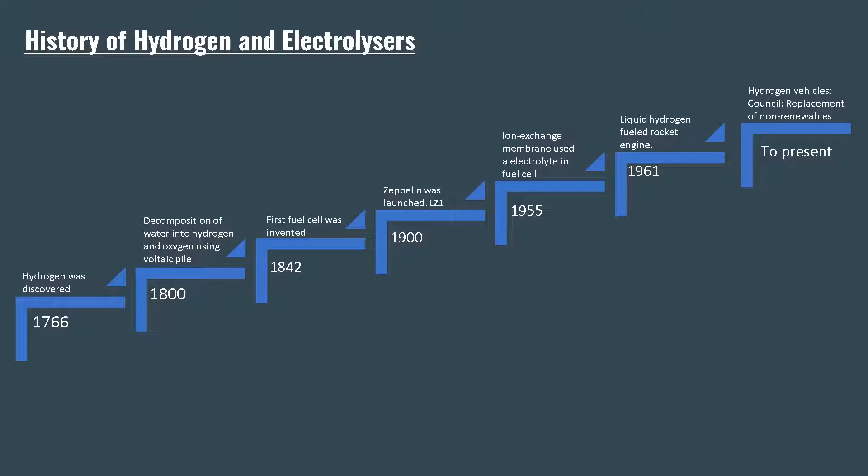Now talking about the types of electrolyzers, there are basically three types: the alkaline, the proton exchange membrane, and the solid oxide. The alkaline electrolyzers are the most primitive type of electrolyzers, and they use a potassium hydroxide solution of about 30% to decompose water into hydrogen and oxygen. Since they were the primitive, they are the most durable and most mature type of technology for electrolyzers. There have been various developments in this type of electrolyzer. Its features include less corrosion problems since the acidic medium is not included here, and also the cost effectiveness of the electrolyzer.

Now talking about the disadvantages, it has a very low current density and gas crossover, meaning the hydrogen and oxygen are mixed, and also a low partial load range. It means that when the electrolyzer is set to operate below its rated power, its efficiency is decreased. Also the operational pressure is very low, meaning the output pressure of the hydrogen from the electrolyzer is low.

Now talking about the proton exchange membrane, it uses a solid polymer for the decomposition of water, and only the hydrogen ions can pass through the solid polymer. Its features include higher current density, good partial load range, higher gas purity, faster response time, higher operational pressure, and compact design. The disadvantages include higher cost, problems of commercialization because it's very expensive, and also the corrosive acidic environment.

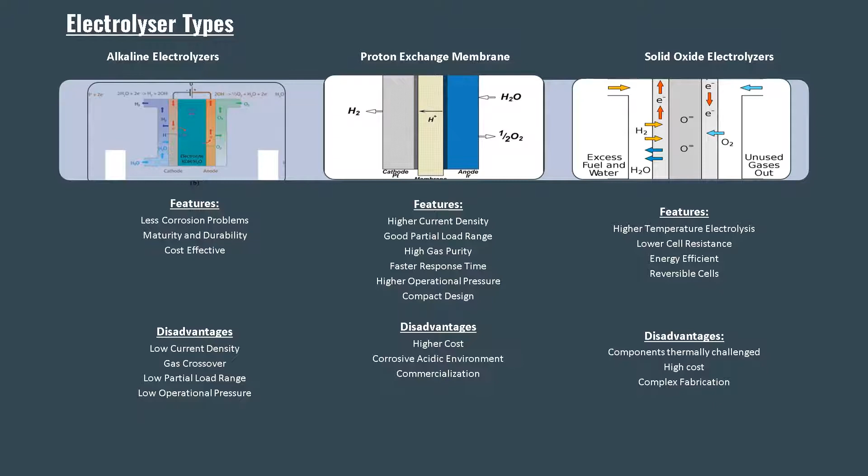Now talking about the solid oxide electrolyzers, they are the most recent and being researched on. They are very high temperature electrolyzers, and due to this there is very low cell resistance, and they are energy efficient since less energy is required to break down water as the temperature is already high. Also, they can be used as both fuel cells and electrolyzers. They use solid oxides or ceramics for the electrolysis process. Disadvantages include the components being thermally challenged because of the high temperature, very high cost, and complex fabrication of the electrolyzer.

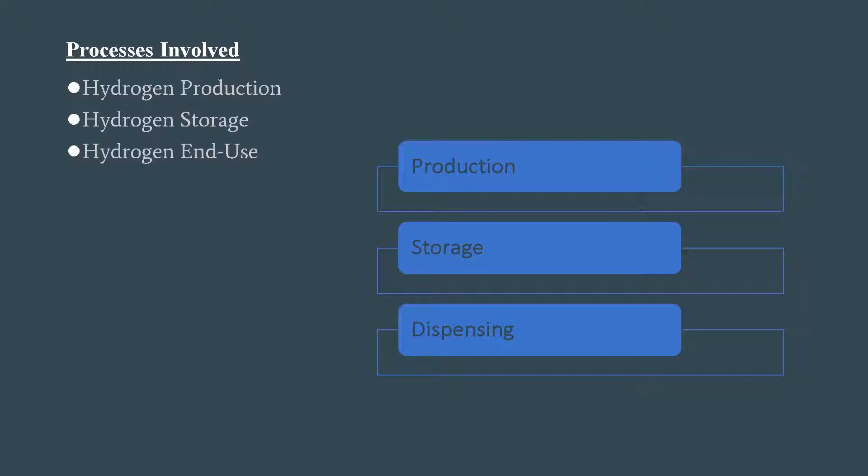Now talking about the processes involved, there are basically three stages: production, storage and end use. This is a complete process chart for hydrogen production, storage and end use. First off, we will be using electricity to start our electrolyzer. The electrolyzer operates at DC voltage, so we will need an AC to DC converter, also known as a rectifier. We will also be using a deionizer because we need to feed deionized water into the electrolyzer and remove all the ions and impurities. And we'll be using a storage tank and a water pump to pump the water from the tank to the electrolyzer.

After the water is dissociated into hydrogen and oxygen, the filtration or purification system is used, which includes a coalescer. The coalescer is filtration equipment which filters aerosols and impurities with a filter where the impurities accumulate over time and are discharged by gravity. After that, in the deoxygenation chamber, impurities such as oxygen mixed with hydrogen are removed by reacting the hydrogen and oxygen to make water and obtain pure hydrogen. After that, it is again sent to the coalescer for purification.

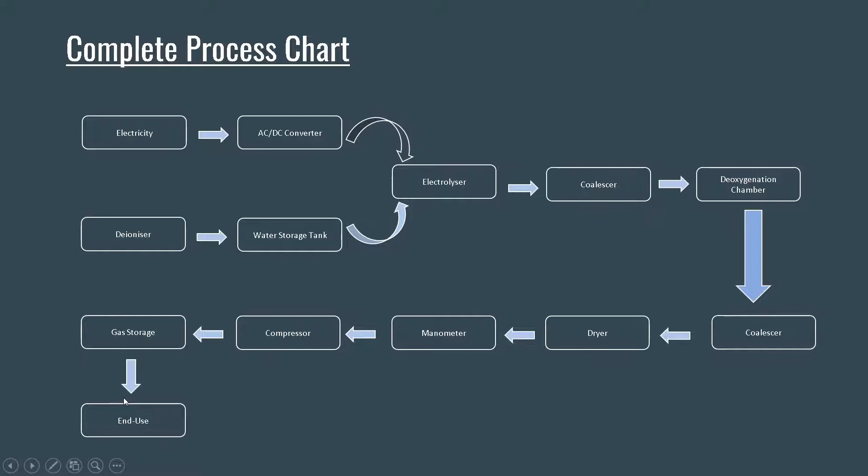After that, it is sent to the dryer before the compressor. We need to dry the hydrogen in the loop. Then we'll be using a manometer for the pressure reading of our hydrogen at the output. We will need a compressor because hydrogen has a very low density, and to increase its energy content we have to pressurize it to a very high pressure, about 300 to 500 bar. After compressing the gas, we will store it in the form of hydrides or in cylinders. After storage, we can use it in various processes, for example in fuel cells, for heating purposes, hydrogen production.

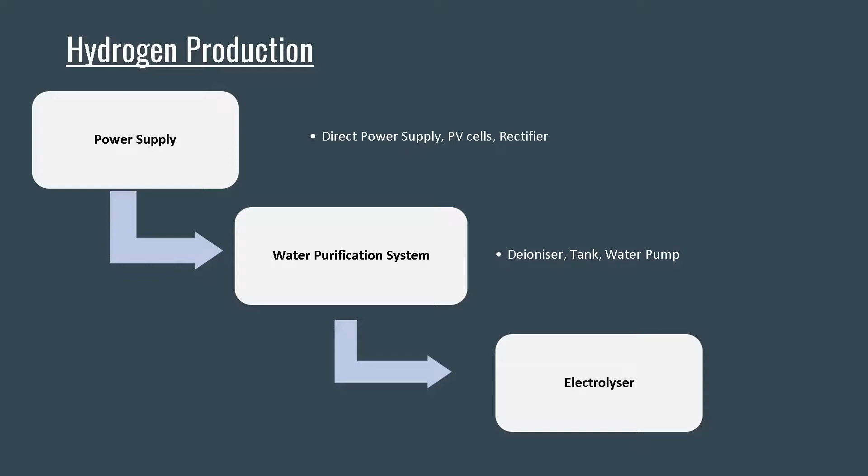So the production includes three main components: the power supply component, with the direct power supply and power coming from hydropower or other green energy sources such as PV cells, and a rectifier to convert AC into DC. Then a water purification system containing the deionizer, tank, and water pump, and our main component, the electrolyzer, to dissociate water.

So this is the specifications of the system. This system is not efficient because this was only used for the study purpose, to know which equipment works and what is the function of each equipment in the process.

So the direct supply we will be getting is 220 volt AC, and a rectifier. The rectifier is used to step down the incoming AC voltage and convert it into DC. Also, the rectifier has been chosen according to the electrolyzer size. The rectifier output voltage is 25 VDC max. The current is 15 to 75 amps, and we will need a cooling system to cool our rectifier because it gets heated over time.

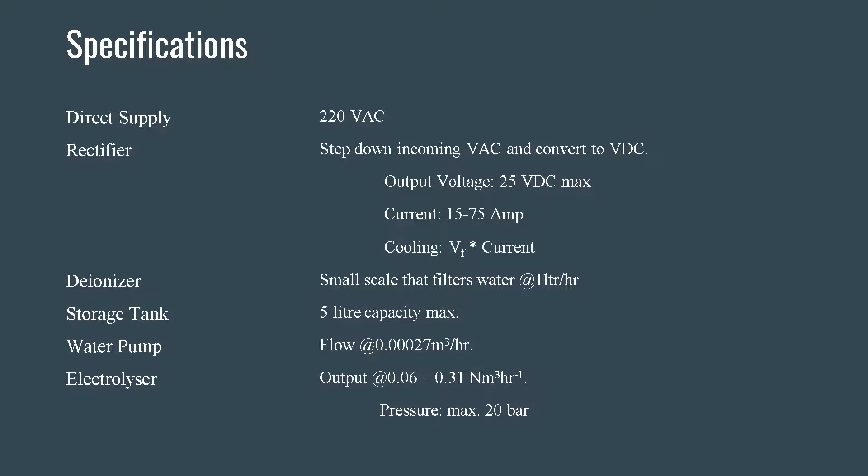We will be using a deionizer that will filter water at the rate of 1 liter per hour. After that, a storage tank to store our deionized water, then a water pump with a flow rate of 0.00027 cubic meters per hour to feed the electrolyzer, and then the electrolyzer. The electrolyzer I used was a PEM because of various advantages over the alkaline. Also, the output was 0.06 to 0.31 normal cubic meters per hour, and the pressure was 20 bar max at the output.

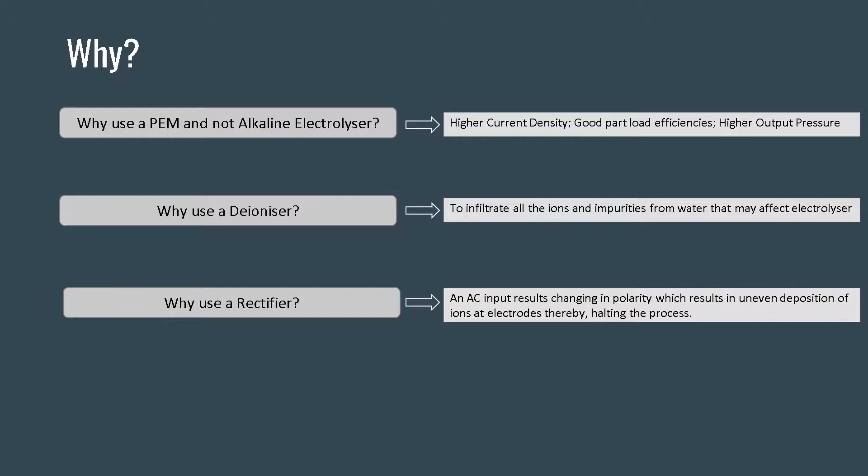So why use a PEM and not an alkaline electrolyzer? As I discussed earlier, PEM has various advantages over alkaline, such as good part load efficiencies, faster response time, and higher output pressure, but its cost is high. So looking at the overall characteristics and advantages, I selected PEM. The deionizer was used to filter all the ions and impurities from the water, and the rectifier to convert AC into DC, because we cannot run our electrolyzer on AC since the change in polarity results in uneven deposition of ions.

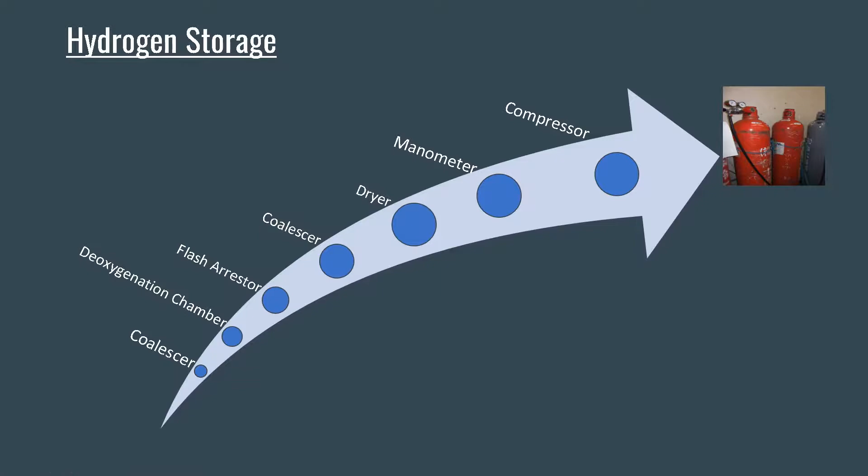Now this is the hydrogen storage. As I talked about earlier, after the hydrogen is obtained from the electrolyzer, we will need a purification system before we store the gas. So we'll be using a coalescer, the deoxygenation chamber, flash arresters, dryer, manometer, and the compressor. I hadn't talked about the flash arrestor. The flash arrestor is a device used in the loop to forbid any backflowing of gases, to prevent any accidents or fire, because we cannot let the gas backflow into the loop. This might cause fire. So the flash arrestor is needed as it restricts the gas from backflowing. So these are the instruments and devices to be used for hydrogen storage.

We will be using sensors to detect hydrogen gas leakage at the output terminal. Also a coalescer for partial drying of incoming hydrogen gas. A deoxygenation chamber to remove any oxygen impurities if present. And also we need safe storage handling for hydrogen, and it needs to be very pure. Flash arresters to prevent backflow of impurities to the hydrogen stream, using 2 of them between the coalescer and deoxidizer. Also, flash arresters that can handle pressure up to 20 bar.

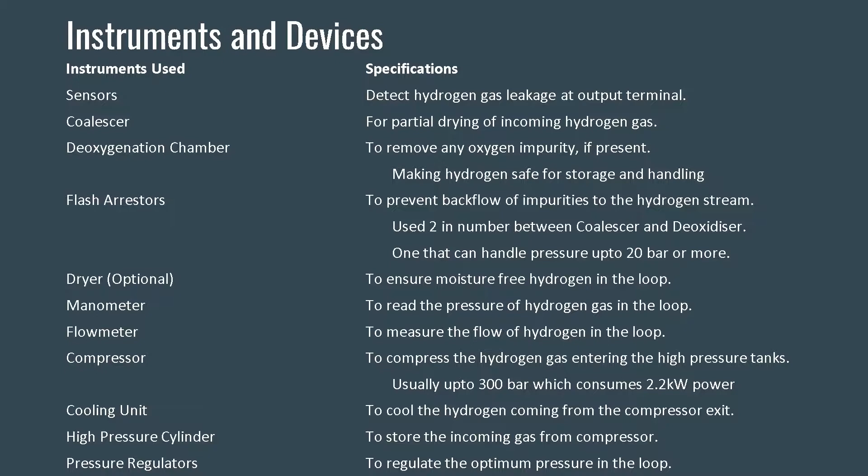Then we'll be using a dryer to ensure moisture-free hydrogen in the loop, a manometer to read the pressure of hydrogen gas in the loop, and the flow meter to measure the flow of hydrogen in the loop. A compressor is used to compress the gas at a very high pressure, up to 300 bar, and consumes 2.2 kilowatts of power. A cooling system for the gas which comes out of the compressor, and also a cooling system for the compressor itself. High pressure cylinders to store the incoming gas, and pressure regulators to regulate the optimum pressure in the loop and in the cylinder.

So this is the hydrogen dispensing system. After storage, we will be dispensing the energy with the help of a fuel cell to convert the hydrogen and oxygen into electricity. After we have obtained hydrogen and oxygen gas, we will use pressure regulators to regulate the pressure required to feed the gas to the fuel cell. And then we'll be using a humidifier. A humidifier is very much needed in the case of a fuel cell because if we send dry gas to the fuel cell, the membrane lifespan is considerably decreased, so we need to moisturize our gas before sending it to the fuel cell.

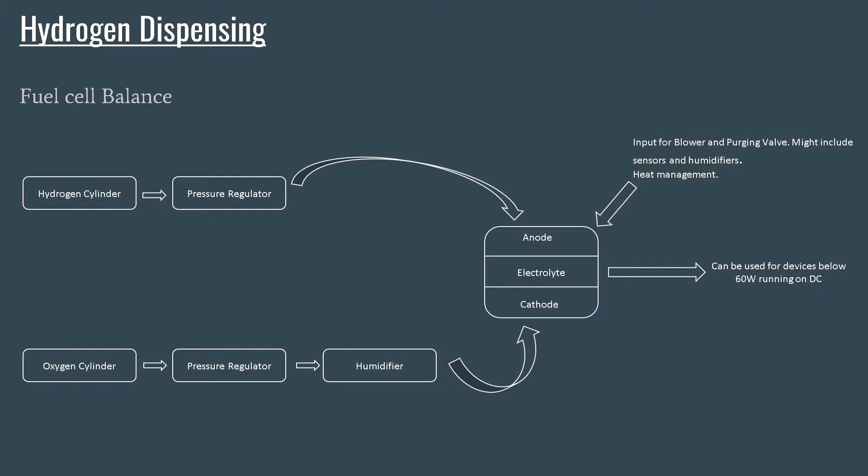The fuel cell was 60 watts in size, as I had considered, and the fuel cell consists of blowers and purging valves. The purging valves were used to throw out the water and other unused gas from the fuel cell, and a blower for cooling the system and heat management. We will also be using sensors and humidifiers inside the fuel cell. And the output of the fuel cell will be used for devices running below 60 watts on DC. So these are the instruments and devices.

The pressure regulators are used according to the amount of pressure required to feed the gas to the fuel cells, usually 0.45 to 0.55 bar for both gases. The humidifier is used to humidify the incoming air to reduce its adverse effects on electrolytes. The electrical input is usually 12 volt for the blower and purging valve for the 60 watt fuel cell. The load is connected for the usage of electricity. The fuel cell converts hydrogen and oxygen into electricity, and its rated power was 60 watts with 20 cells. The sensors were used to detect gas leakage, and the flash arresters to forbid the backflow of gases.

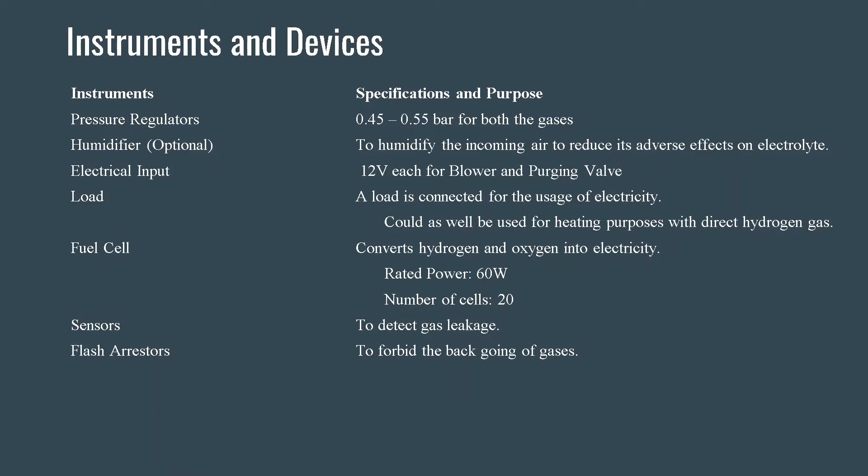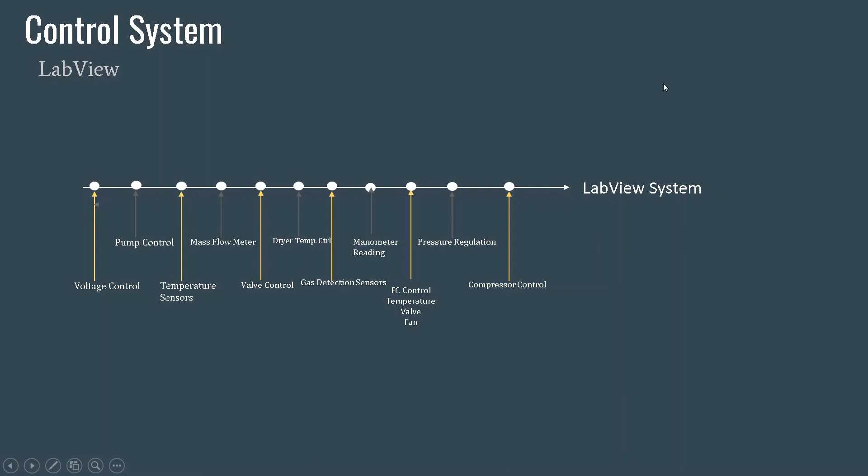So this is the control system of our entire system. We'll be using LabVIEW because manually regulating each and every component would be very tedious and inefficient. So LabVIEW is used to configure our entire system and also control it from the same place. We'll be using LabVIEW for everything like pressure regulation, voltage regulation, manometer reading, dryer temperature, output pressure measurement, temperature, valve control, fuel cell temperature control valve, etc. So LabVIEW must be used to make the system efficient and ensure proper functioning of the process.